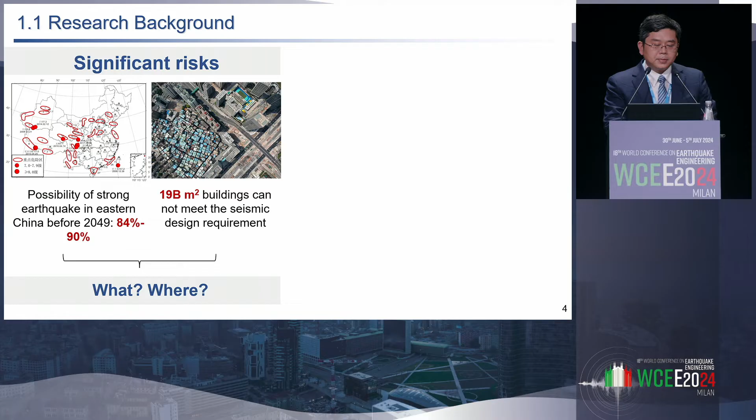So you can clearly see that my presentation contains 2 parts. Why do I bring these 2 parts here? It's because, firstly, in many countries, including China, we have significant seismic risk. So we want to know what will happen if an earthquake comes, and where the risk is. Another issue is that we are living in an aging population. We have a lack of construction laborers, so who and how can we address these significant risks?

So first, for the what and where of the significant risks, we need to do multi-hazard simulation of real-world large cities. Such simulation should be accurate, efficient, and realistic, because the managers of the city are always non-professional people. There have been some very good models for city-scale simulation, but many of these models are empirical models. So they use previous earthquakes to predict the damage of future earthquakes.

However, for example, in China, we haven't had an earthquake in the dense cities for many years, and we have a lot of new structures that never experienced any earthquake in human history. So facing this question, we said, okay, maybe we can move to the physics-based model.

So no matter what kind of city or what kind of building you are, you should follow the nonlinear structural dynamics. So we can use nonlinear time history analysis to analyze the behavior of a building or a city in an earthquake.

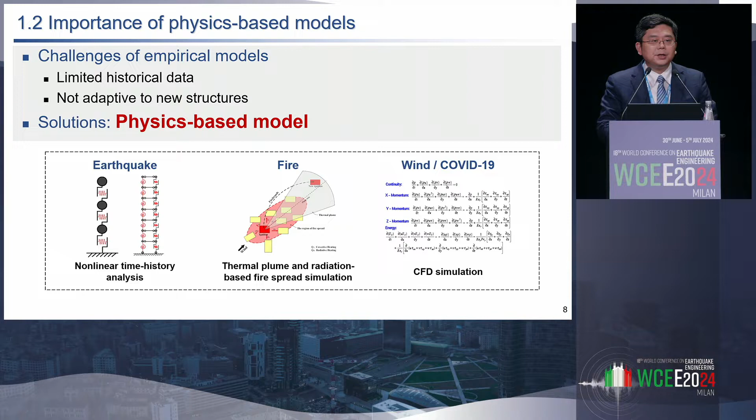And when we talk about the lack of construction labor, I'm a structural engineer, and all the design work is very labor intensive. How to improve construction efficiency is a big problem throughout the world. Particularly for the design industry, we have problems like low efficiency that cannot satisfy the demand.

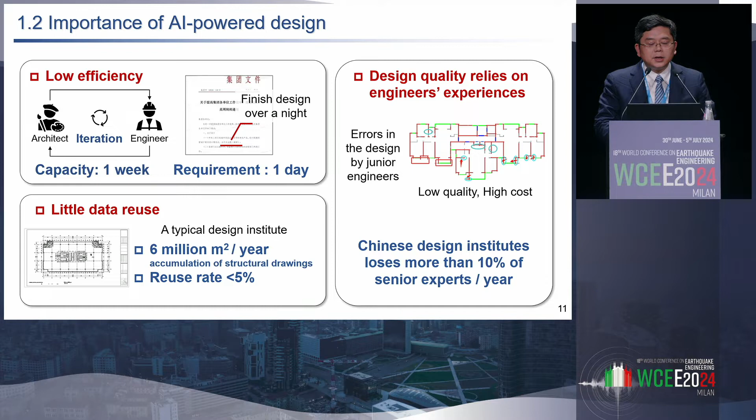We have a lot of design data, but little of it has been used. And our design quality relies highly on the engineer's experience. So if we can bring AI to help us, we can improve our design efficiency. We can change the knowledge of design from the brains of the engineers to a fixed asset of computing code of the company, and we can also improve the design quality of junior engineers.

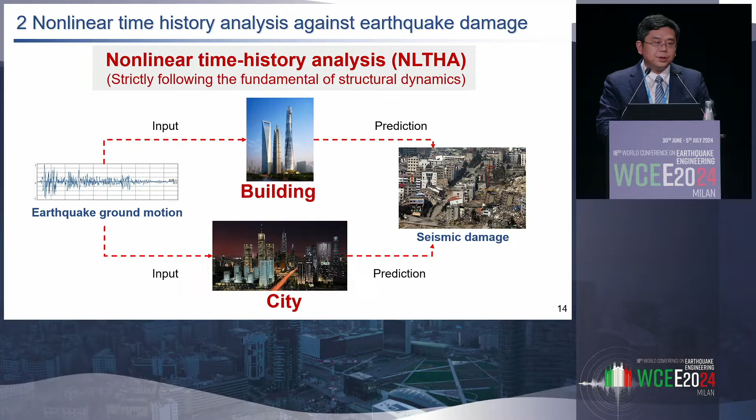Okay, so first I'm talking about nonlinear time history analysis from building to city scale. As I mentioned, if we can do nonlinear time history analysis of a building or a city, it will strictly follow fundamental structural dynamics, so we can address the problem of new cities or new buildings.

When I began my career on this topic about 20 years ago, China started building a lot of super-tall buildings. The buildings are very, very tall, their component size is huge, and we are facing very strong earthquakes. So it became a critical challenge to us.

And I'm thinking about why we do nonlinear time history analysis of the building. I think our purpose is to quantify the performance of the whole structure under strong earthquakes. That means our numerical model should analyze the complex whole structure, and we can study the collapse behavior of the structure.

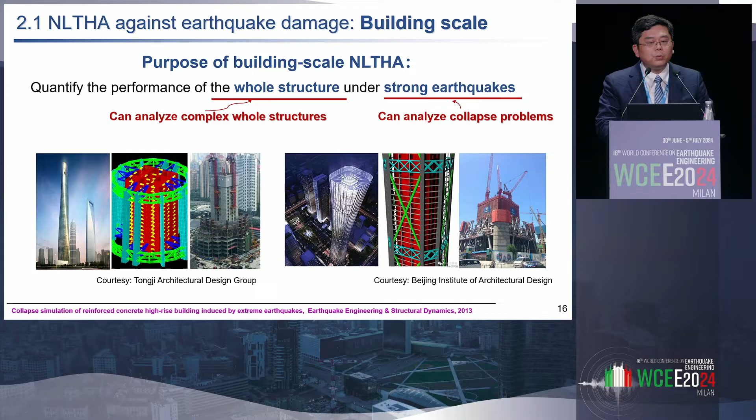If you look at the photo of this real-world structure, although we have many very good numerical models, few of these models can be used to do collapse simulation of this real-world big structure. So we propose using the fiber beam element model and the multi-layer shell element model, because both models are based on material constitutive laws. So they are very adaptive to different materials, component sizes, and loading conditions for real-world structures.

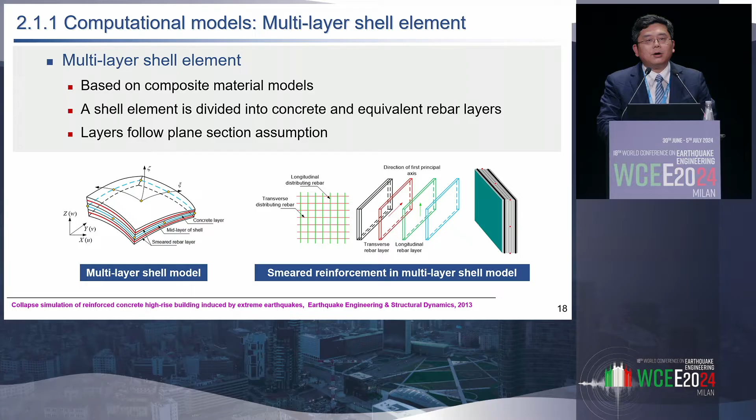Many of you are very familiar with the fiber beam element, and we did some work on the multi-layer shell element. We have a shell element and we divide it into many layers, concrete or steel, so that we connect the micro-scale material behavior with the macro-scale bending force and shear force at the component scale.

We also developed some new shell elements with better performance to simulate the behavior of shear walls. And some of these models, as Professor Deierlein said, have already been integrated in the OpenSees software. So finally, in 2010, we could use this model to do the collapse simulation of the tallest building in China. This is the Shanghai Tower, with a height of 632 meters. We use fiber beam elements and multi-layer shell elements to simulate the components of this super tall building.

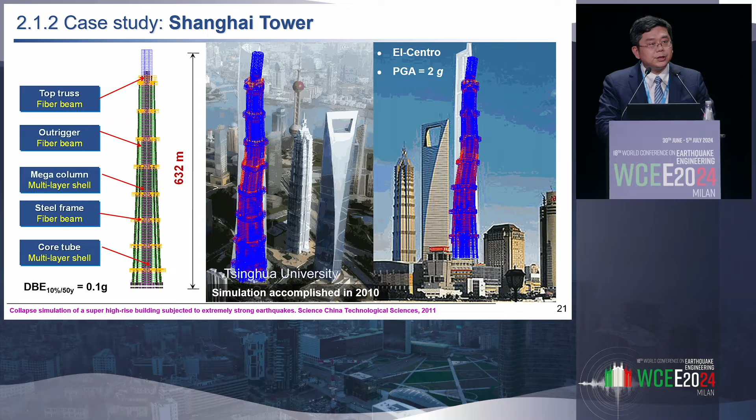So we can clearly see how the failure starts from the coupling beams, then goes to the mega columns and the shear walls, and finally to the outriggers. So it helps us understand the failure mechanism of this super tall building.

Okay, so in addition to this simulation, we can actually use this technology for design optimization of real-world structures. In 2011, Beijing planned to construct a super tall building with a height of more than 500 meters. And the design intensity of Beijing is 0.2 g, so it is a very strong earthquake load.

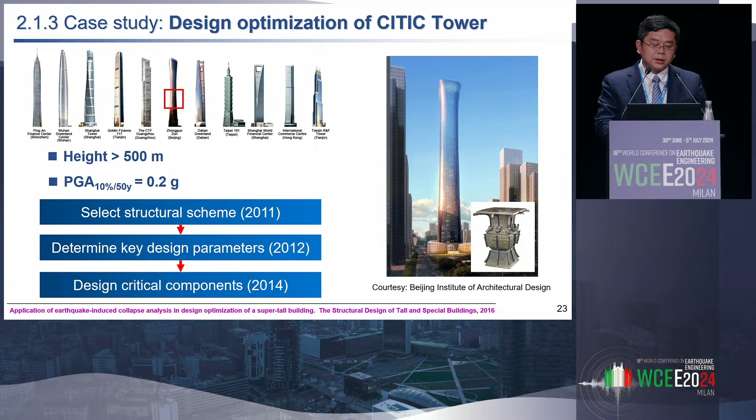We were involved in this project from 2011 to 2014, from the selection of the structural scheme to the design of critical components. At the beginning, the design agency gave this kind of design, which we called a half-braced scheme. They have the mega brace in the lower zones of the structure and remove the mega brace for the upper zones of the structure.

We found there's a lot of problem for this structural scheme. For example, in the surface between the mega brace and without mega brace, there will be a weak point and induce the collapse of the building.

So when we find the weak point of the structure, we can work together with the design agency to optimize the design. After the optimization, we get the fully-braced scheme. We can increase the collapse margin ratio by about 15%, but at the same time save material by about 11%.

So this 11% of material is 84,000 tons, which is quite a lot of money. So this optimization is quite welcomed by the design agency.

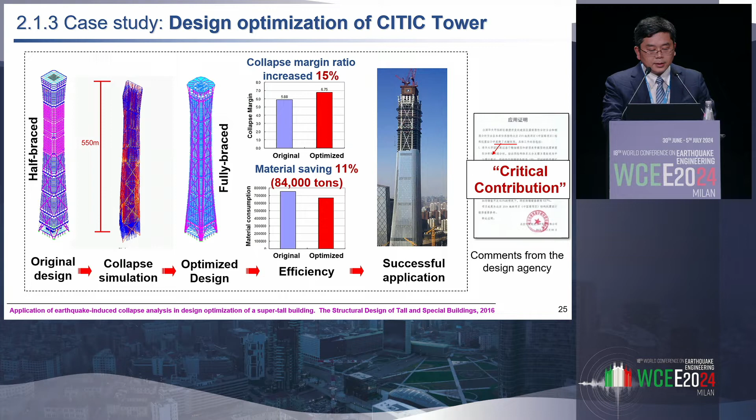Furthermore, from our simulation we can find that the failure always happens at zone 6 of the tall building, so this will be a critical part of the structure. We can increase the shear wall by embedding some steel braces to increase its strength and ductility.

We did the collapse simulation and found that such embedded braces only increase the steel consumption by about 0.1%, but can increase the collapse margin ratio by more than 12%. So it is a very efficient way to improve the collapse resistance of this tall building.

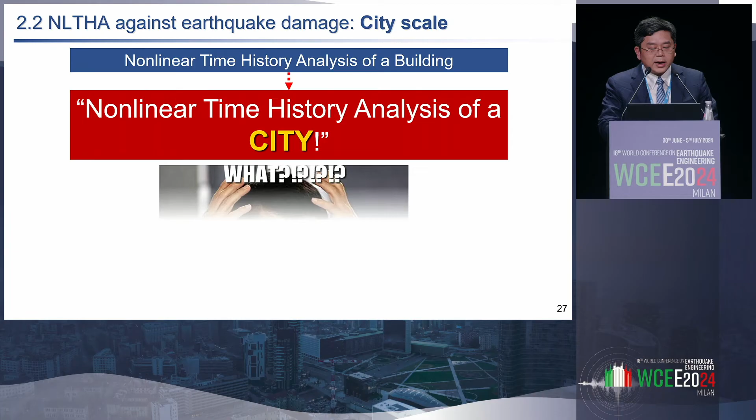So when we finished the two super tall buildings, we thought that since we can do nonlinear time history analysis, why can't we try to do a nonlinear time history analysis of a whole city? About 17 years ago, we had the beginning of this idea.

Some of us said, okay, this is a very crazy idea. Why? Because for a single building we have very detailed structural information, and no matter how complex the structure is, it's only one building.

But when we're talking about a city, we have very limited design information. We cannot get the design drawing for each building, and we have hundreds of thousands of buildings to analyze.

So we said, at that time we don't know how to model that, we don't know what kind of computer can solve this problem, we don't know how to display the result, and we even don't know who will use the result.

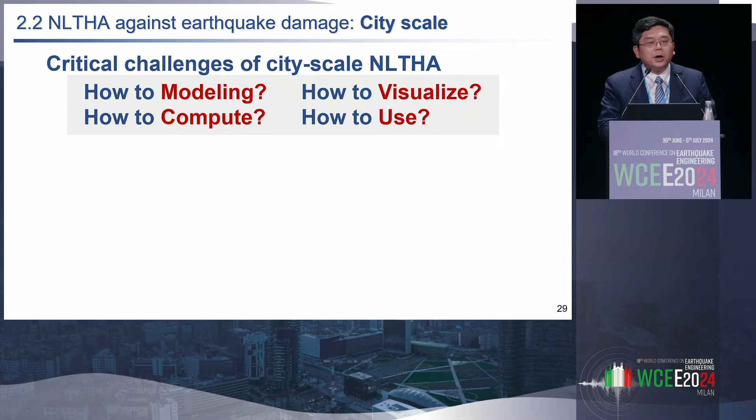But as Newton said, we should stand on the shoulders of giants. There are two giants here: one is AEBM by FEMA, and another is IES by Professor Hori. Based on these two models, we proposed the city-scale nonlinear time history analysis method.

This method has received awarded patents from China and the United States. It can strictly follow the fundamentals of structural dynamics, and it can accurately represent the characteristics of different buildings and different ground motions.

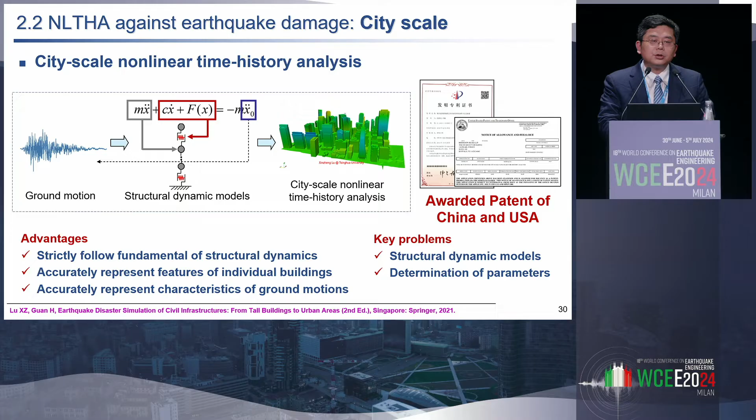So the key problem of this method is how to establish the structural dynamics model for each building and how to determine the parameters of each building. So we propose this multi-scale structural dynamics model.

For conventional buildings, we select the moderate fidelity model. We use the MDOF shear model for frame structures or masonry structures, and the MDOF flexural-shear model for tall buildings. Of course, for some special buildings we can use the high fidelity, refined model to do the simulation.

Another challenge we are facing is how to determine the parameters of the MDOF model based on the building inventory, because we don't have the design drawing of each building. So we propose a method: based on empirical formulas we can determine the story stiffness, based on the design code we can get the design strength, and based on test data we can get the actual strength and actual ductility of the building.

Because time is limited, we cannot go into too much detail. The detailed work can be found in the paper shown at the bottom of the slide.

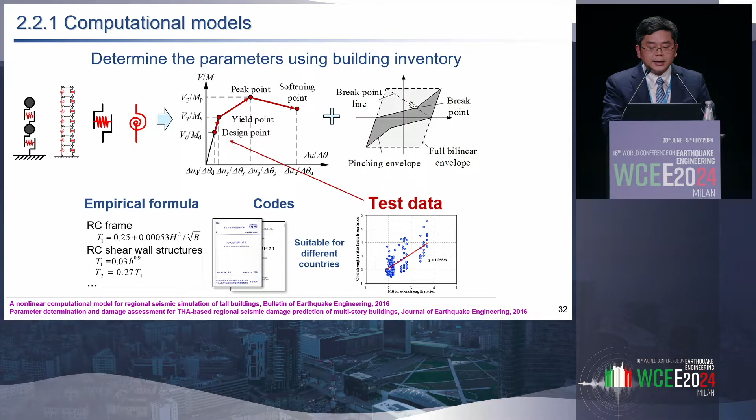For the computational challenge, although you have a city with thousands of buildings, if you buy a GPU for about $1,000, you can have hundreds of cores. If you let each core compute for each building, you can get a very high acceleration ratio, so you can use a very low-price computer to do the simulation.

This kind of city-scale time history analysis has many advantages. First, it has high accuracy. Because it's a physics-based model, you can easily do a lot of comparison: you can compare with test data about interstory behavior, compare with monitoring data to know the drift, and also compare with actual earthquakes to predict the damage.

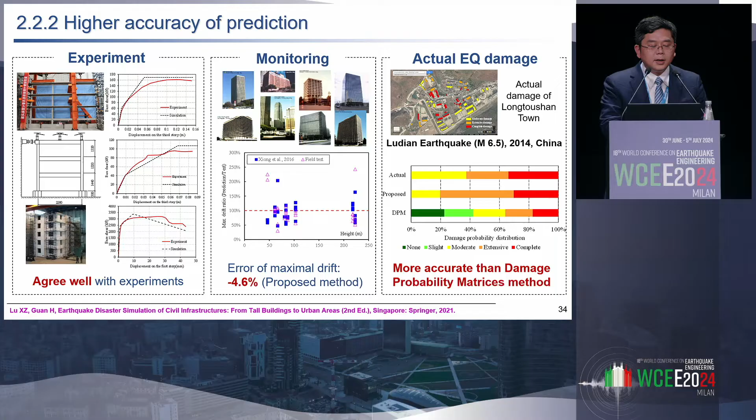The second advantage of this method is that it's very good for visualization. In old days, when we did earthquake damage prediction, we only showed tables or numbers, but this is very hard for non-professional people to understand.

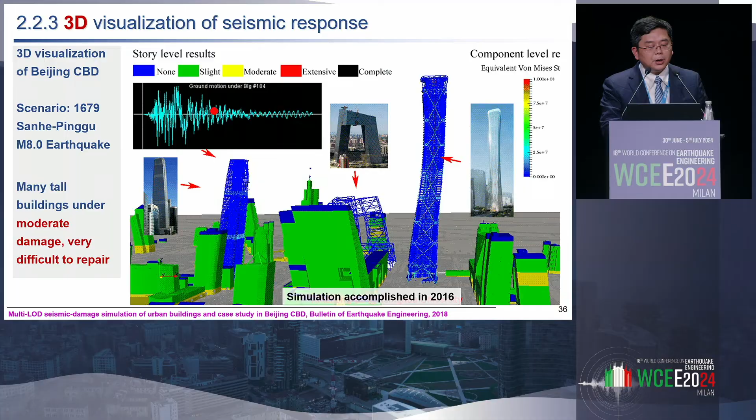We input the Sanhe-Pinggu magnitude 8 earthquake, and we can clearly show the shaking of the tall buildings. We not only know the shaking of the building, we can also know the damage of the building. Blue means no damage, green means slight damage, and yellow means moderate damage. So we can know the damage of each building on each story at each moment, and it's very easy for people to understand.

Further, if we combine this dynamic simulation result with some photorealistic three-dimensional model, we can produce something like a movie to show the shaking of this city. It's very easy for non-professional people to know what will happen to their city if an earthquake comes.

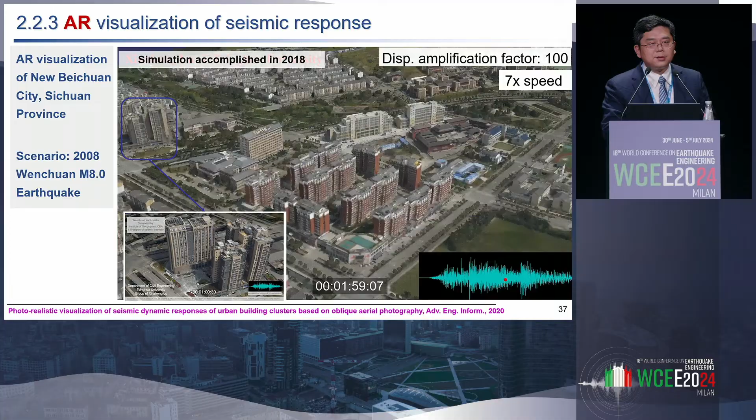This method can also be used for complex terrain. This is the new Beichuan city. We can not only shake the buildings but also shake the mountains, and we can see the deformation of the mountains. We can understand why the acceleration on top of the mountain will be stronger than at the foot of the mountain. So it can help us do a lot of study.

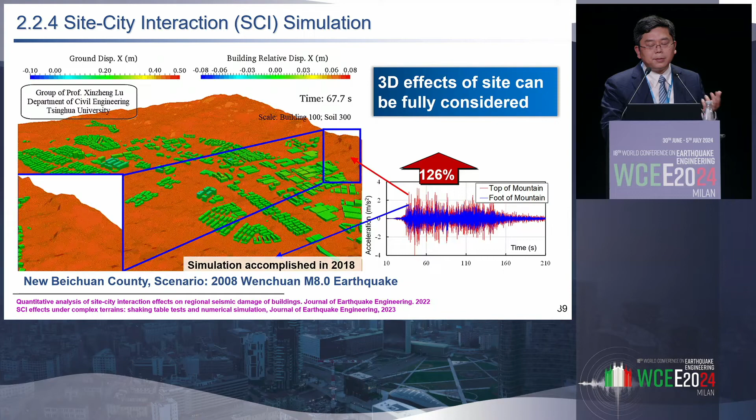The fourth advantage of this method is that it's very good for resilience assessment. Now everybody is talking about resilience, but to assess resilience we need more EDPs, engineering demand parameters. We not only need interstory drift, we also need, for example, peak floor acceleration or residual displacement of each story. With nonlinear time history analysis we can know all these EDPs for each building, and when we combine it with a good performance group and a good data model, we can get a better prediction for the resilience of the city area.

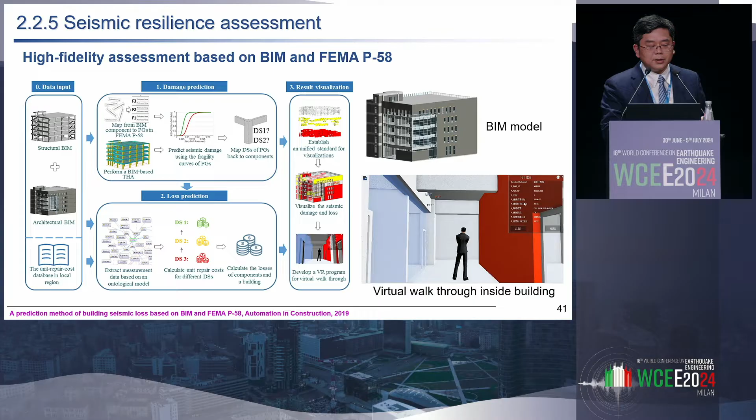For example, we can combine the building information model with FEMA P58. Then we can know the damage on each component, and we can go inside the building to see what happens to it. We can further extend this to a city scale.

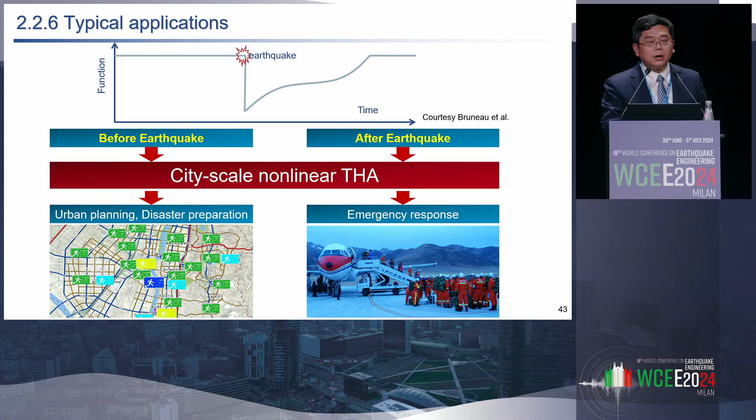This technology has many applications, not only for disaster prevention before an earthquake, but also for emergency response after one. A typical example is what we did together with the SimCenter for the San Francisco Bay Area. Professor Steve Mahin helped us collect 1.8 million buildings in the San Francisco Bay Area.

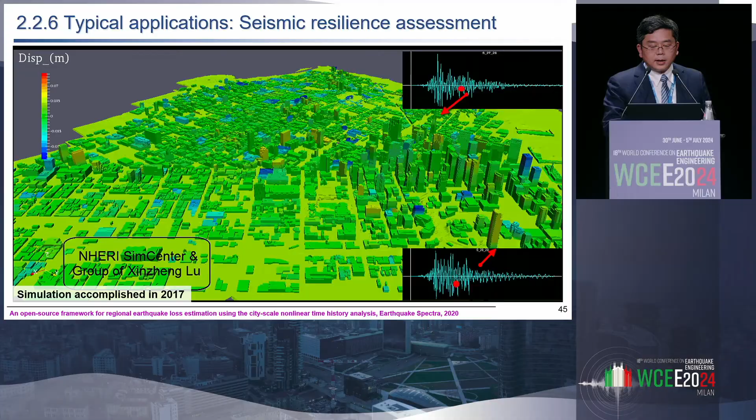This is a magnitude 7 earthquake generated for the Hayward Fault. With this scenario, each building has a different ground motion, so we can clearly see the shaking of the entire San Francisco area subject to this earthquake scenario. It clearly shows the movement and even the damage of each building in downtown San Francisco. With this simulation result, we can further study the loss ratio and the repair or rebuild time of each building, which sets up a very good foundation for our study on resilience.

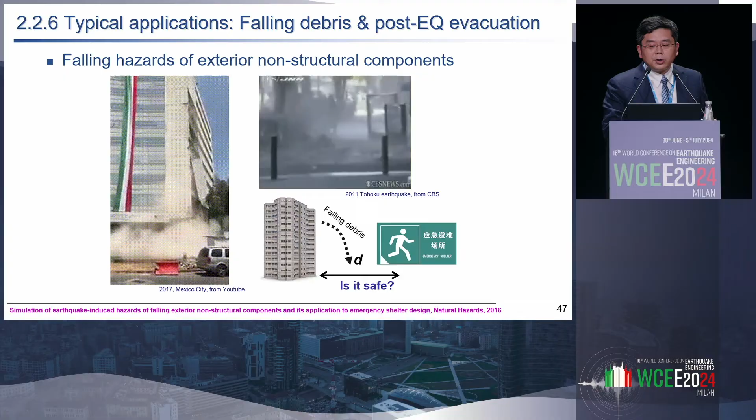Another advantage of this method is that it can be used to study secondary disasters, for example falling debris. This is some footage taken from the Mexico earthquake or Japan earthquake — the building is still standing, but debris falling down from the buildings may kill people. How to predict this falling debris is a very critical question, but with our city-scale nonlinear time history analysis, we can solve this problem.

So we first do the analysis, then we know the shaking of the building, the interstory drift of each building, and also the velocity and acceleration of different stories. With this, we do the experimental work to know the failure criteria of the falling debris, and simulate the distribution of the falling debris on the ground.

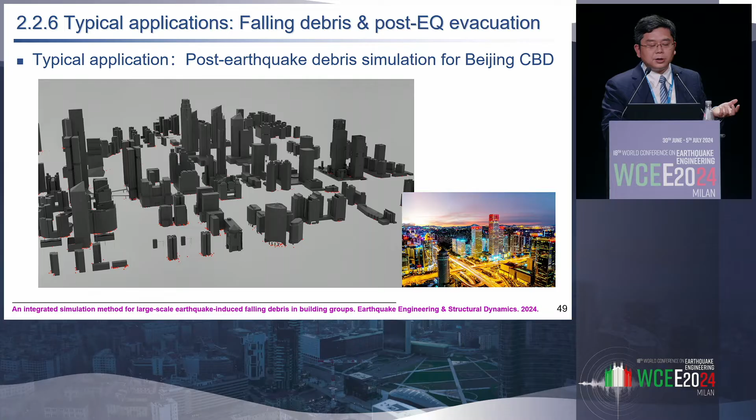With this falling debris data, we can use it, for example, to select a better emergency shelter location considering the falling debris, or we can do the evacuation simulation considering the falling debris. You can see that because of the existence of falling debris, the evacuation time changes quite a lot.

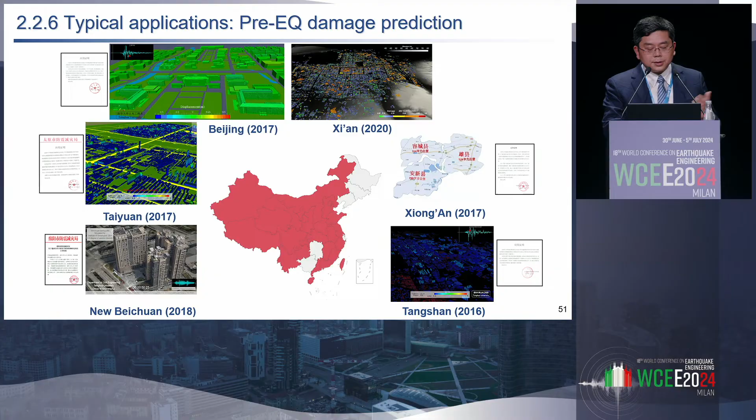This technology has been used in many Chinese cities. Here are just some examples. One of the recent, very interesting applications is in the 2022 Beijing Winter Olympic Games, where we used this technology to assess the seismic risk of the Olympic regions and got very good comments from the Olympic Organization Committee.

This technology can not only be used before an earthquake, but also for post-earthquake assessment. In traditional ways, when an earthquake happens, we use a lot of empirical models to predict the seismic intensity and building damage, and they have a lot of uncertainty.

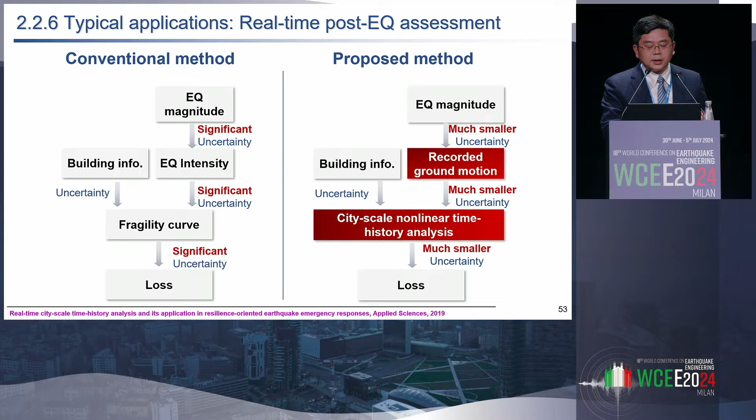Now we can directly use the recorded ground motion and do city-scale time history analysis to significantly reduce the uncertainty. So we developed this platform, called real-time earthquake damage assessment using city-scale time history analysis. We call it REDACT. We use the very large strong motion network in China.

This is one of the typical applications of this technology. In 2017, China had a magnitude 7 Jiuzhaigou earthquake.

After the earthquake, some agencies used the conventional way to predict that this earthquake would result in tens of thousands of building collapses. We used our model to predict very small possibility of building collapse. When we reported this result, they were quite surprised because it was a magnitude 7 earthquake. How is it possible? But after one month, the site investigation showed that the collapse ratio was only about 0.1%, which agreed very well with our prediction.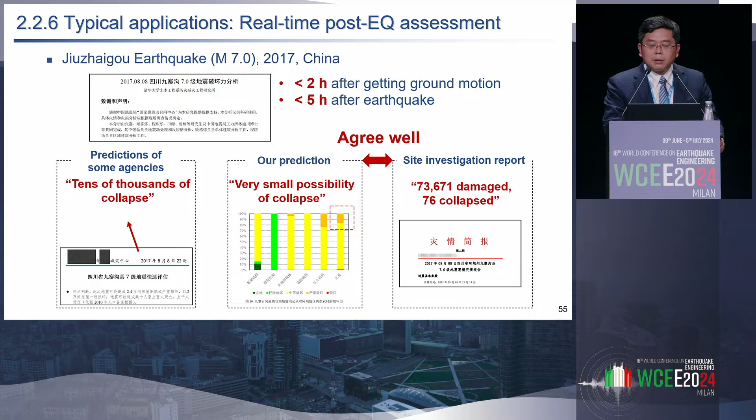So then we want to extend it not only for earthquake but also considering different hazards. When working on a city, we always face the problem of how many systems we want to build up - a system for earthquake, another for wind, another for fire. So we want a platform for all these multiple hazards. Also, the city not only worries about the regional scale, but also about some important buildings, so there are multi-scale problems.

So we thought, why not call it a city information model? We combine the GIS model and the building information model together. With this city information model as the database, we do physics-based hazard simulation, and this result can serve many different purposes.

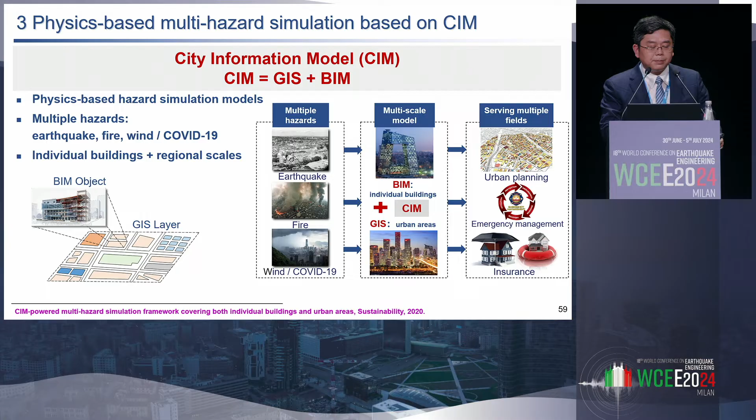This is a typical example where we set up the city information model of the entire Tsinghua University campus. We have the entire campus model and also detailed models of important buildings, so we can do regional scale simulation for earthquake, fire, wind, even COVID, and also building-scale simulation for different hazards.

Here is one example of how we do physics-based fire simulation at building scale with this city information model. We start from the building information model, then extend it to FDS fire simulation. We can get a fire scenario, and we can also do evacuation simulation in such cases.

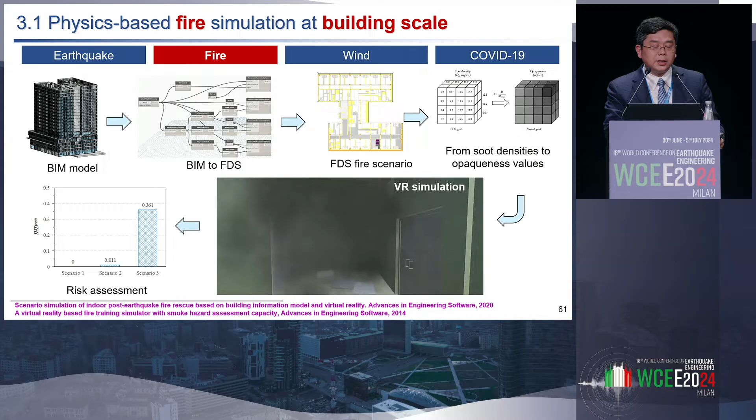And we can also do the physics-based fire simulation at the regional scale. The older empirical fire spread models have many problems, so we propose using a physics-based fire simulation. We consider the thermal effect, the radiation effect of fire, and the 3D evaluation of the buildings.

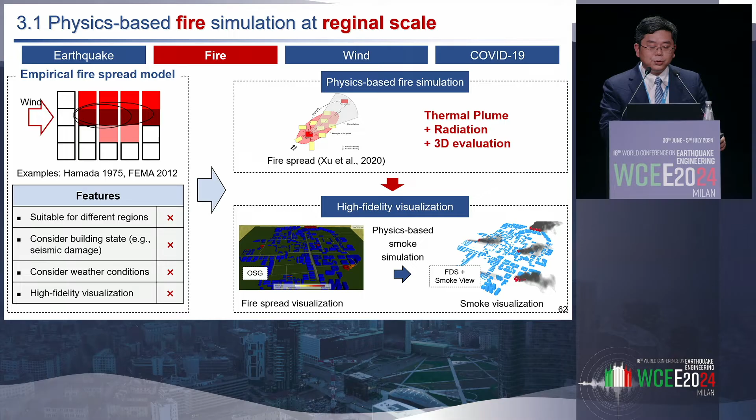So here is a typical example where these two towns had fires in China, and our simulation result agrees quite well with the actual disaster. And the advantage of this physics-based model is that we can very easily combine one disaster with another. For example, we have a physics-based fire model and a physics-based earthquake model. We can connect them together, then we can do the physics-based simulation of fire following earthquake. And they have many advantages over existing models.

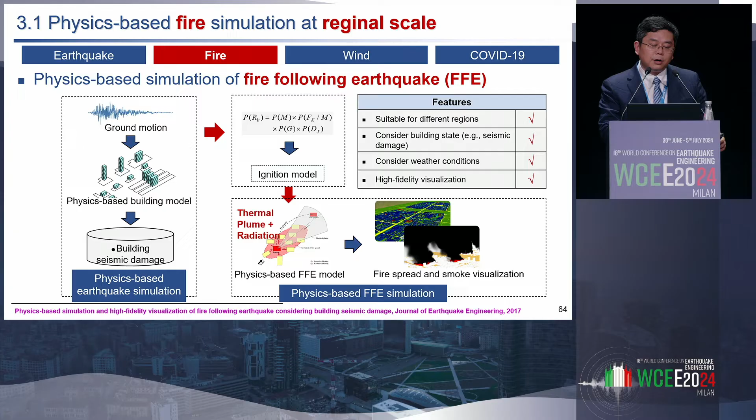So this is what we did for Taiyuan City, fire following earthquake. You can see that the simulation result is quite similar to the real-world fire following earthquake.

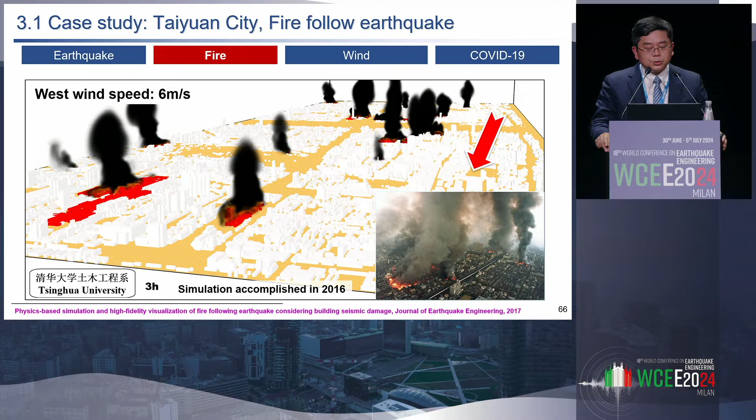And we can also do it for wind. The conventional empirical model for wind has many problems. So we can combine the city-scale time history analysis, dynamic analysis of buildings, with the city-scale large eddy simulation. So we can input the dynamic wind load to the building to get the dynamic response of these buildings.

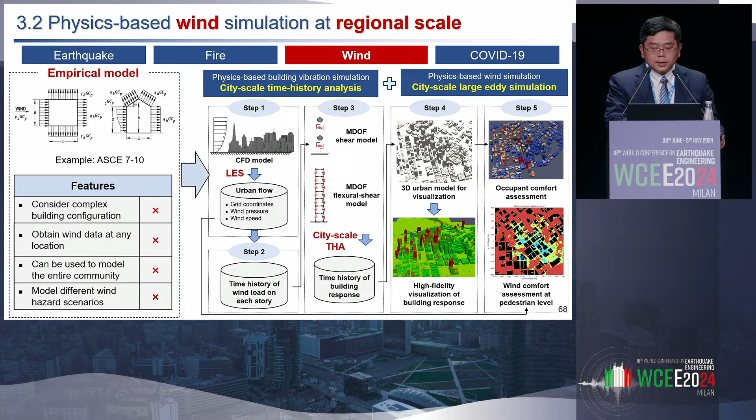It is very interesting to find that because of the overlap of different buildings, the wind load on the building is quite different from the design load. And also we find that the dynamic response of this building is quite different from what the design code specifies in our design specifications. And we can even do it for COVID-19.

On Monday, we had a very beautiful song in the opening ceremony about everybody fighting against time. And in January 2020, at the outbreak of COVID, we had the real-world challenge to fight against time. We were ordered to construct a hospital in only 10 days, from nothing to in service. This is a very challenging question, and one of the problems is how to reduce the infection risk caused by the harmful air. Because the time is very limited, we should be very efficient and very accurate.

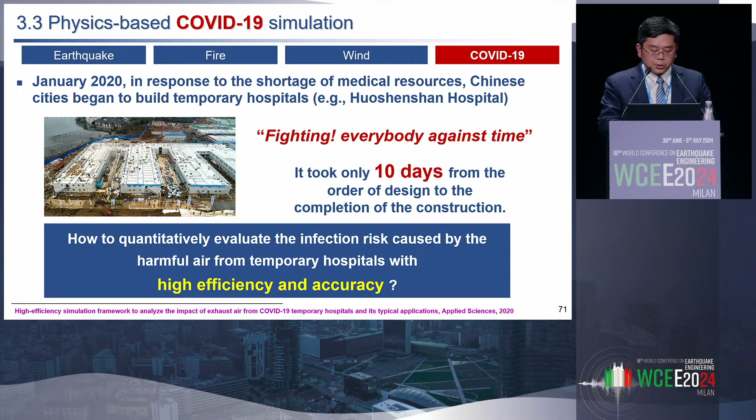So we used our proposed method so we could finish the design optimization in hours. On January 28, we finished the design optimization of a hospital in Wuhan. The next day, we finished the design of Ditan Hospital in Beijing. And then the next day, we finished another hospital in Wuhan. So we can finish the design of each hospital in one day, and the total sick beds we served are more than 10,000. So I got a very special award from the Ministry of China. I think this is a very important award to me because we really saved lives.

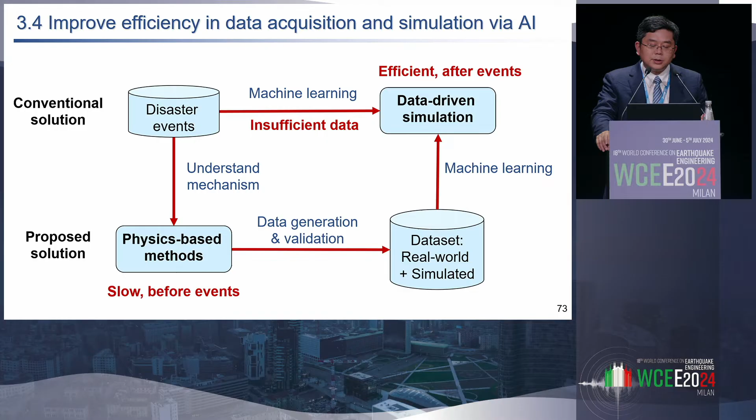And today, a lot of people are talking about using AI to further improve our disaster simulation. And we always suffer the problem that we don't have sufficient data to train our AI. So we propose that we can use our physics-based model to generate a lot of simulation data, and combine the real-world disaster data with simulated data to do the machine learning, so we can get a better data-driven simulation for the city.

It means after AI learns so much data, it can generate a new thing, a new face. And the new face is so realistic, you cannot distinguish the real-world people from the AI-generated people. So when I saw this animation 7 years ago, I recognized that, okay, there will be a revolution in our industry. Why? Because we are structural engineers. The most important outcome of our work is the design drawing.

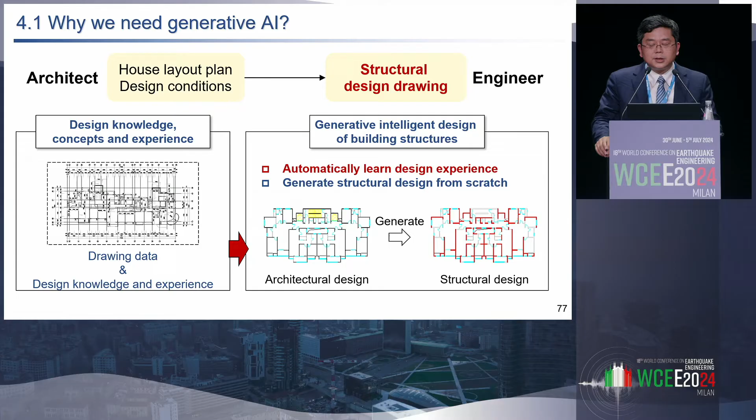No matter if it's a face of people or a design drawing, it's only a picture to a computer. So if AI can generate a human face looking like a real-world human, why can't AI generate a design drawing looking like a real-world human design? So that is the fundamental idea of why we can use generative AI to help us do structural design and improve design efficiency quite a lot.

And there are 3 key algorithms to help us generate this AI-based design drawing. Engine 1 is the generative adversarial network, GAN. Engine 2 is the graph neural network, GNN, and engine 3, we call it the diffusion model. The equations of these algorithms are not shown on the slide, because I think after 2 days of very productive conference, everyone is quite tired. So I don't want to talk about too much physics and mathematics here. I just want to show the fundamentals of these algorithms.

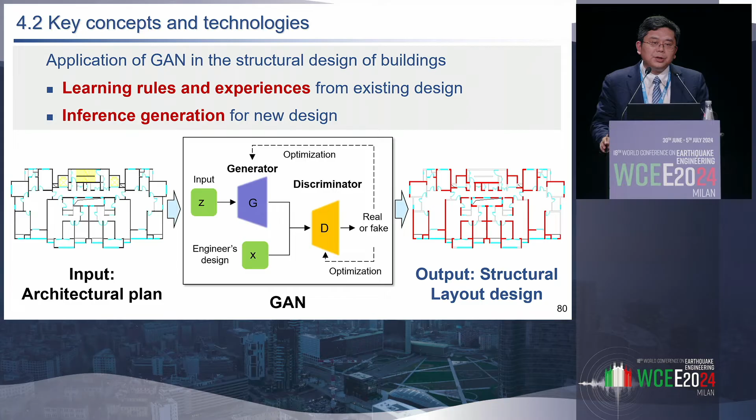So we can do it for AI-powered design: we keep inputting design drawings to the GAN for the AI to learn how to generate a new design. And after optimizing against each other, they can generate a new design that looks like a real-world human design. The second algorithm is GNN.

What is a GNN? The data should start from a graph. A graph is a topological structure made with nodes and edges. The GNN is a neural network working with a graph. And there are several algorithms that can be used for structural design. The first one we call the edge classification problem. What does it mean? It means that we have two objects. We want to know the relation of these two objects.

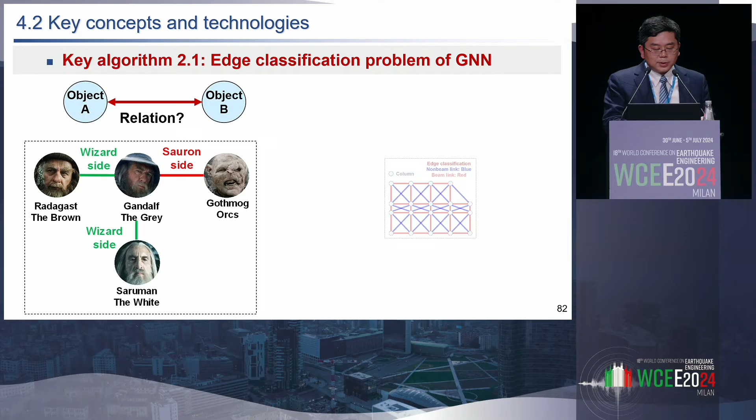So we can use The Lord of the Rings. We have all seen the movie The Lord of the Rings. We can use it as an example. So we can see that we can separate these people to the wizard side or Sauron's side. So this algorithm can help us with structural design, for example, the layout of the beams.

So we can make the link between every two columns in a structure. And we let the AI learn the existing frame designs. Then the AI identifies, OK, this link is a real-world beam we need, and this link doesn't need to be a beam. So with this algorithm, we can finish the layout of the beams of frames with AI-powered design.

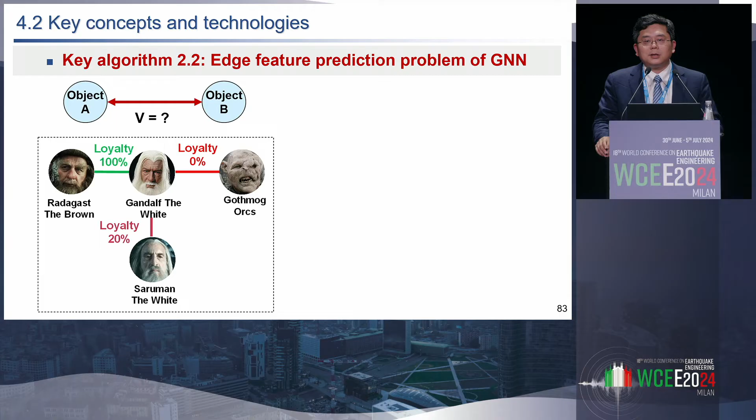Another algorithm is the edge feature prediction of GNN. It means that we have two objects, and we need to predict the value between the two objects. We still use Lord of the Rings as an example. We can say, OK, even if these characters belong to different sides, they have loyalty between these different characters. And this algorithm we can also use, for example, for the layout of the shear wall. So between any two nodes, we want to lay out the shear wall.

There are several possibilities. If it is a continuous shear wall, the feature will be 50%, 50%. If on the left side is a shear wall and the right side nothing, then it will be 50% and 0. If both sides have shear wall but with a door in the middle, the edge feature will be 30% and 30%. So after learning, AI predicts the feature between the two nodes, and then AI knows how to lay out the shear wall.

And also the diffusion model, where we can remove the noise from the drawing, and finally the remaining components, the remaining pixels, will be our final design result.

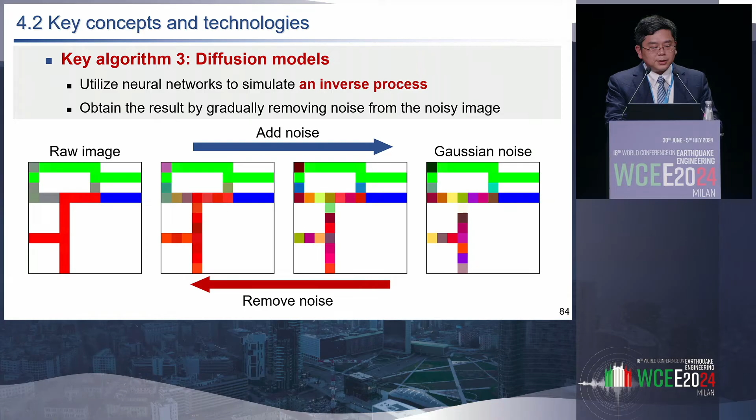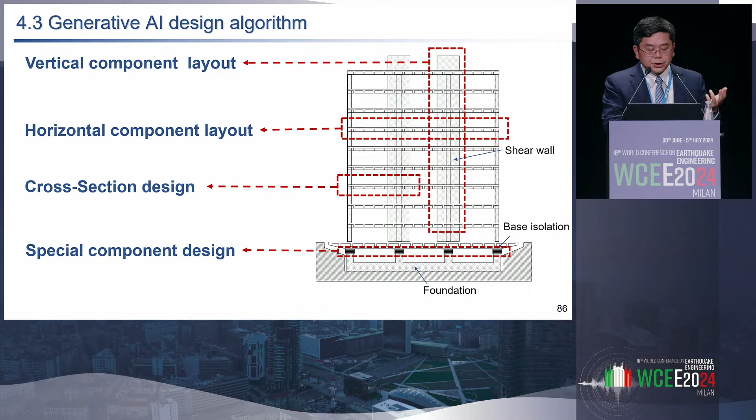OK, so after this algorithm, the next step is to establish a data set for AI to learn. So we established maybe the world's largest structural design data set for AI training. So currently, AI can do this work: vertical component layout, horizontal component layout, cross-sectional design, and even some special components like base isolation design. Because today we are talking about earthquakes, I will first emphasize the layout design of shear walls.

So how do humans design shear walls in the real world? This is what engineers do. Firstly, the architect has the architectural planning and the design conditions of the building. For the first step, we lay out the shear wall at the locations given by the architecture. Then we consider the design condition. For example, we have the design intensity, and we change the total area of the shear wall. Then we do the structural calculation to predict the structural behavior to satisfy the design code. And finally, we use some empirical rules to further improve the details of the shear wall design.

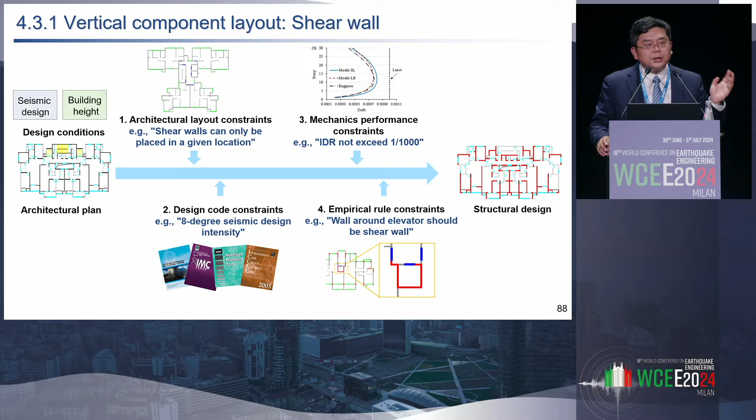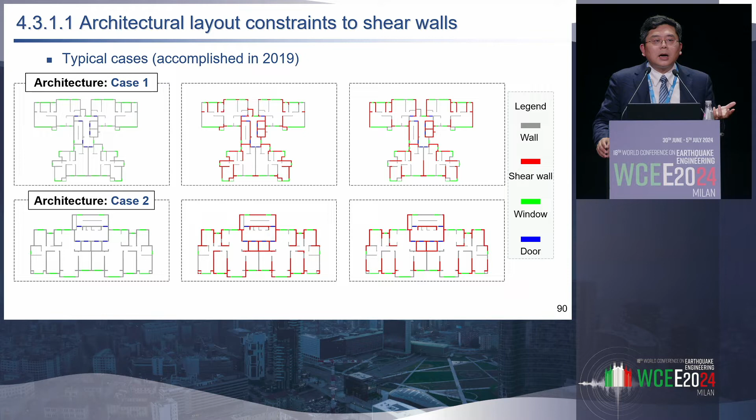So we simulate the human design procedure and propose algorithms to solve this problem. First is how to lay out the shear wall according to the architectural layout. We propose an integrated design method for shear wall layout based on different algorithms. The details can be found in these papers. And this is what we get. On the left are two buildings' architectural layouts. The green means windows, the blue means doors, and the gray lines mean walls. On the right is the layout of the shear walls. Some were done by humans, and some by AI. Can you identify which one is done by human and which one by AI?

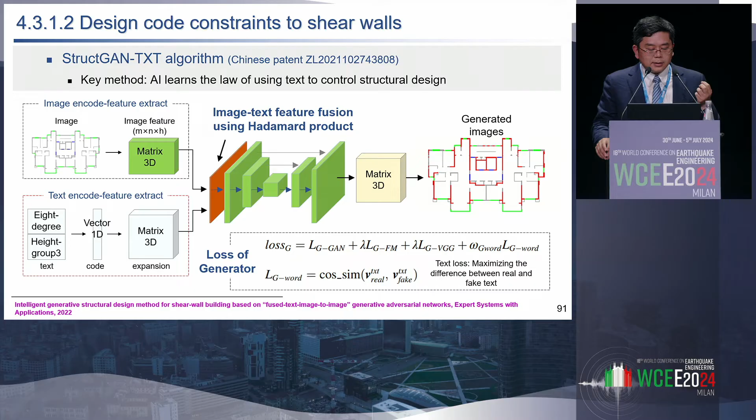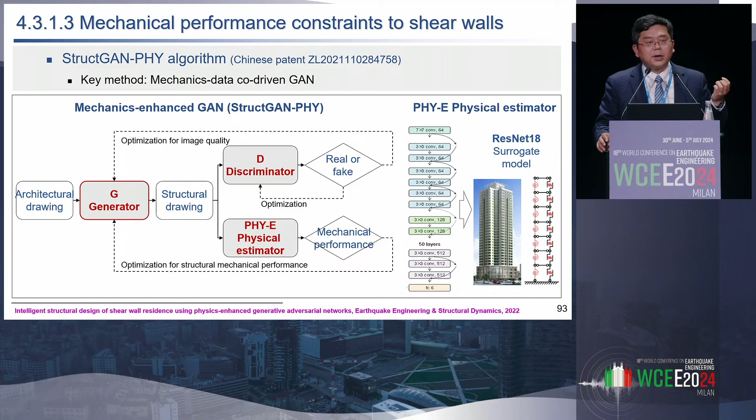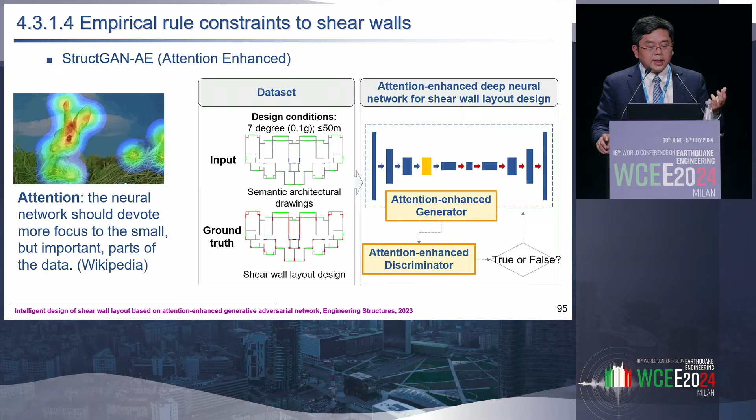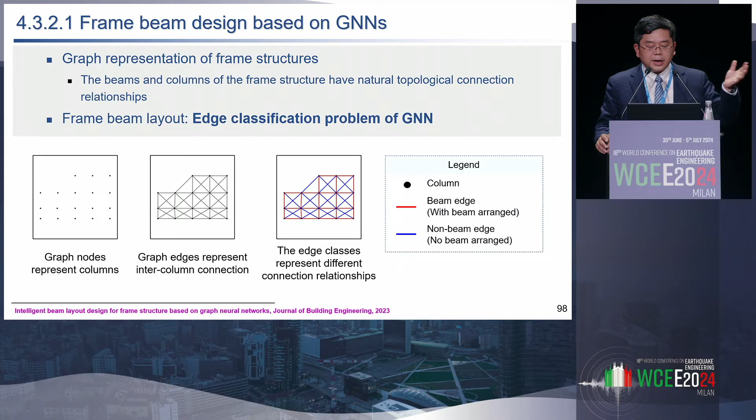On the left are two real-world frame structures, the arrangement of the columns. On the right are the layouts of the beams. Can you identify which one is done by AI and which one is done by an engineer? And here is the result.

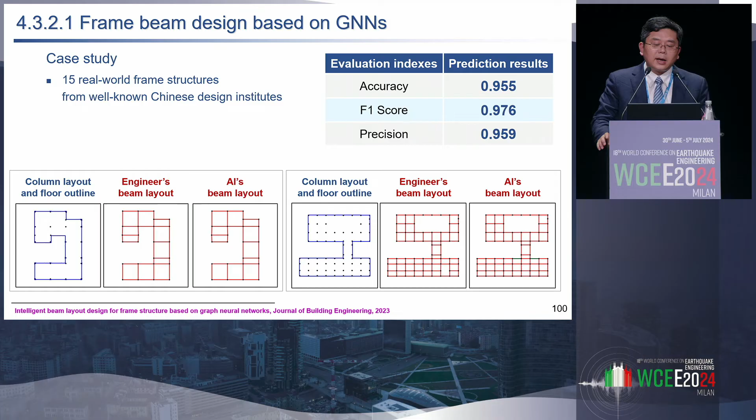The AI design is almost about 95% accurate compared to human design. And now we can further extend the beam layout to shear wall structures, but the problem will be more complicated. Because if you have two columns, there's only one beam. But if you have two shear walls, there are infinite possibilities for arranging beams.

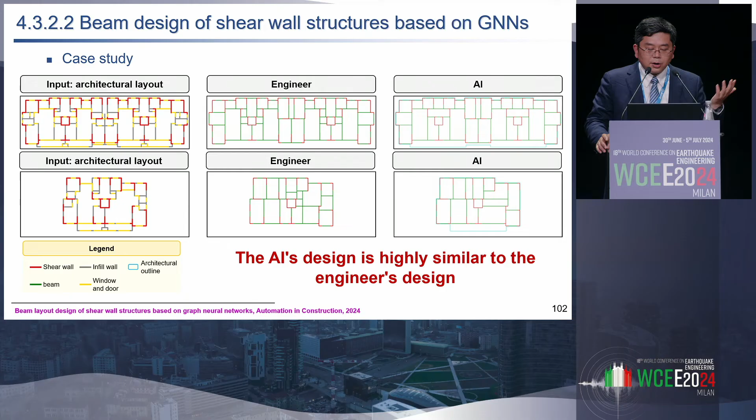And after the layout design, we can do the cross-sectional design. We propose what we call the rule-embedded generative adversarial network. We can consider the design conditions, the design drawings, and also the domain knowledge to generate the cross-sectional size of the components. Here are two examples.

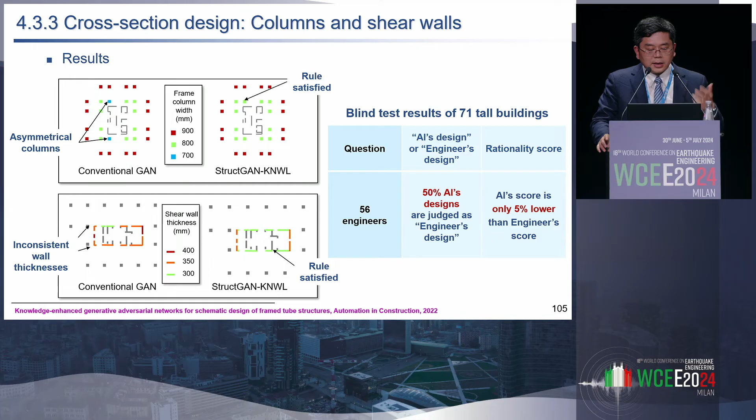For example, on the top, AI can generate the section of the columns, and with the knowledge embedded, the columns will be symmetric. And on the bottom, the AI can generate the thickness of the shear walls, and with knowledge embedded, the shear walls satisfy the consistent thickness. And we selected 71 tall buildings and did a blind test with 56 engineers, and about half of the AI designs were successfully judged as engineer designs.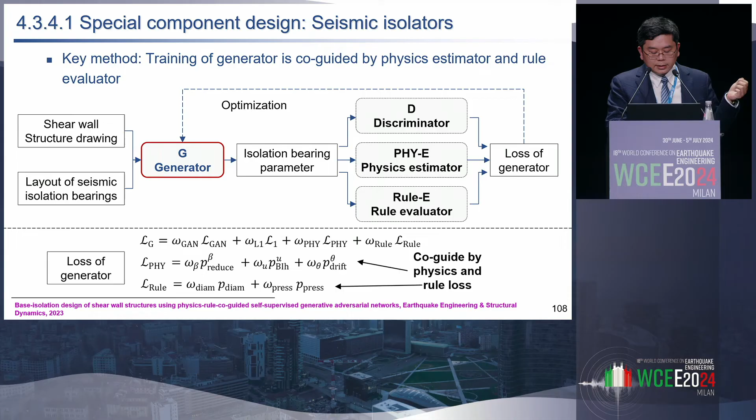And also, we can do it for some special component design. For example, for base isolation design, we can combine the discriminator, physics estimator, and rule evaluator together to generate the base isolators. So this is an example. We determine the base isolators. All the isolation bearings have suitable diameters, and the building satisfies the design code, but is not too conservative. The design efficiency is improved about 60 times. You can finish the work in just 30 seconds.

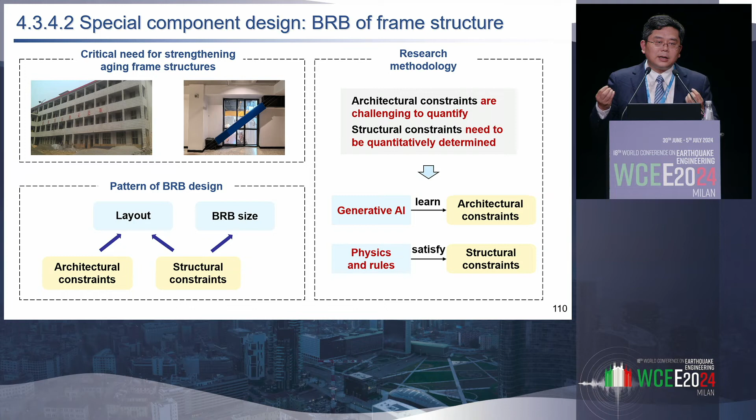And also we can do it, for example, for BRB braces for the strengthening of structures. But the layout of the BRB braces needs to consider the requirements of architecture, and the architectural requirements are quite difficult to model. So we use AI to learn the existing drawing data and then predict the feasible positions according to architectural requirements.

So here we have a two-stage design procedure. First, we use generative AI to get the feasible layout of the braces, and then we do structural optimization to get the final location and the final section of the BRBs. So here is the example. After the two stages, the brace design can be finished in 15 minutes, totally automatically.

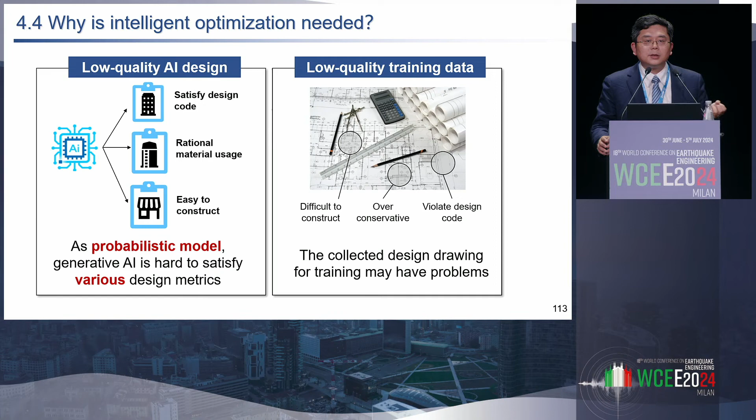And also we can use AI for optimization, because sometimes AI just doesn't give a very good result, or doesn't have very good training data. So we can do what we call intelligent optimization, meaning we use big data and learning to do the optimization. For example, when we do the dynamic assessment or the material usage evaluation, we can use the AI as a surrogate model to accelerate the procedure.

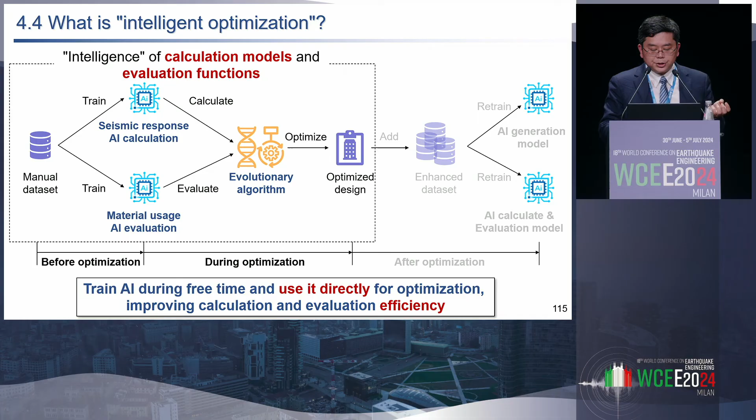And even after the optimization, we can feed the optimized data back as training data to make the AI more powerful. The key technology here is graph representation and the GNN algorithm for the entire structure at micro, medium, and macro scale. We have a building with three scales of information. First is the micro scale, for example, the sectional height and thickness. The second is the medium scale, the topological arrangement of structural components, and the macro scale, for example, the design conditions, the seismic design code.

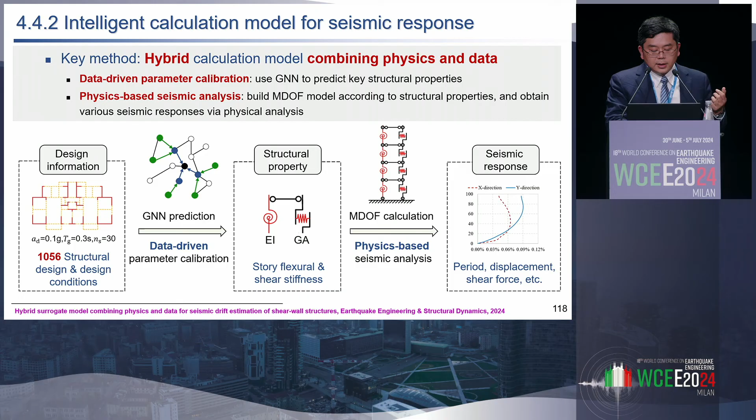So with this algorithm, we can use AI to generate more than 1,000 buildings, use them to train the GNN, and then use it to predict the structural response. And here is the result. The prediction is better than existing models, and the structural response can be predicted in less than 1 second. We can also use this method to predict material usage. So with sufficient training data, the AI can work like an engineer with 30 years of experience, knowing the material usage within a second. So this is how we do the work.

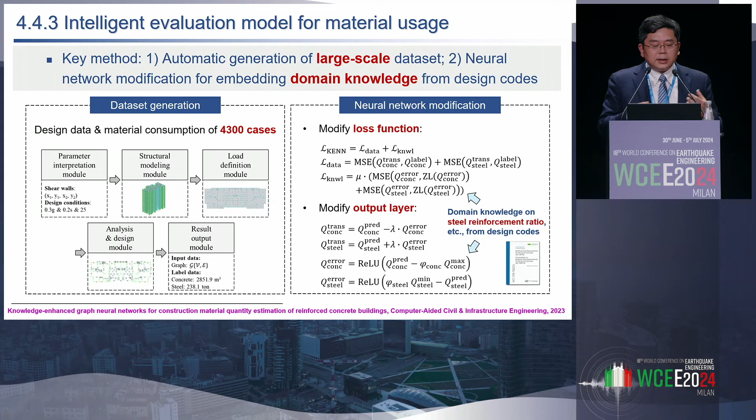First, we have AI, so we can design as many buildings as we need. So we designed 4,300 buildings, and also embedded domain knowledge into the neural network. And now we can predict the material usage, and the time is just 0.36 seconds to predict material usage.

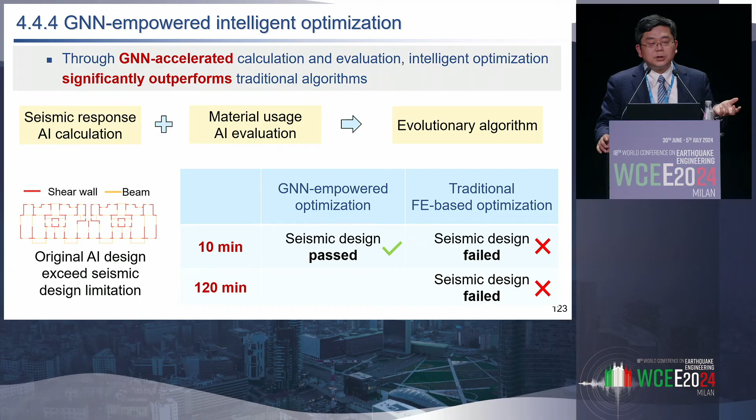So we combine the AI calculation of seismic response and evaluation of material usage, and we can do the structural optimization. For example, for this case, in 10 minutes, AI can generate a result that passes the seismic design. If you use traditional finite element, even after 2 hours, they still can't get a good result.

And we can also use the optimization algorithm to further improve the data set quality. Why? Because if you have low-quality design data to train the AI, then you get a bad AI, and bad AI gets bad design. But after your optimization, you get a very high-quality data set. And using this high-quality data set to train AI, you get a good AI, and good AI generates good design outcomes.

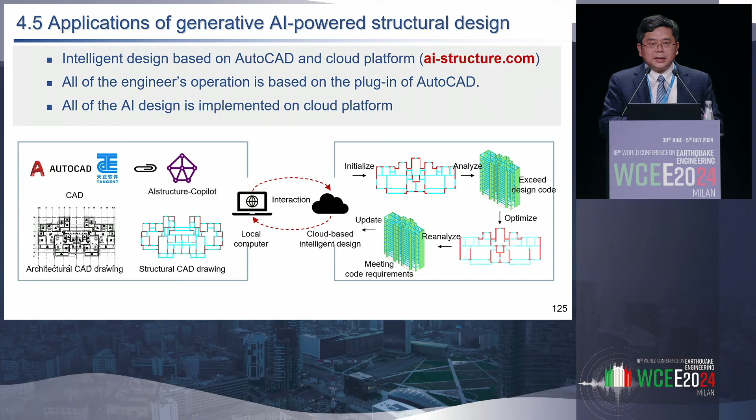So the engineers just use AutoCAD to prepare all the information they need. And then they upload the design demand to the cloud computer. And the cloud computer finishes the design and sends back the design result. So this work can be very fluently embedded in the daily workflow of the engineers.

So with this system, when the engineer has an architecture drawing, in 1 minute, AI will generate 3 or 4 different design results with different algorithms, including the shear wall design, the beam design, the sectional design, and the material prediction. Here shows the result.

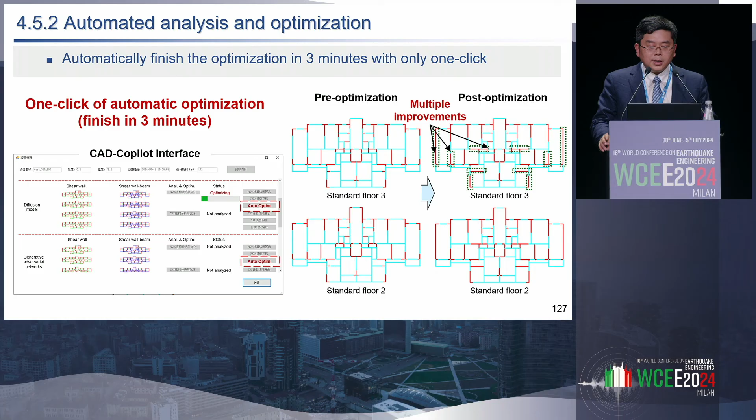And if you are not happy with the AI design result, you do a click, and in 3 minutes, you will get an optimized result. And here shows an example that with this one-click operation, you can get a much better optimization.

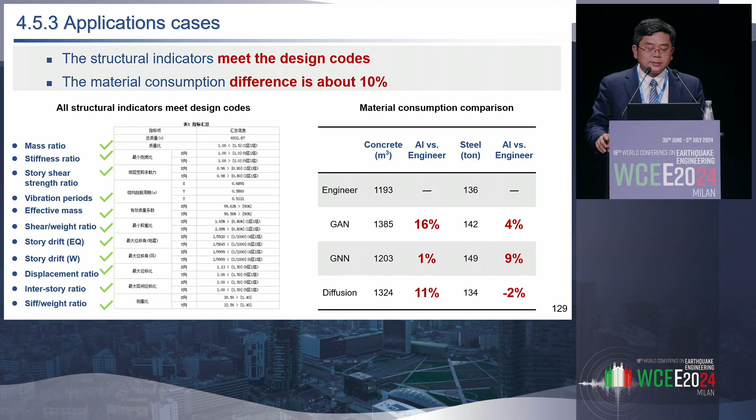And you can check the AI design outcome and find all the AI designs can meet the design code. It is not only the inter-story drift ratio or vibration period. We can check all these factors, and all these can satisfy the design code. And the AI design has similar material consumption as the engineer design. You can see that generally within 10%.

So the system has been online for about 1 year. We have 100 design institutes using the system. And this system has finished more than 1,500 design cases. If you look at AI as a real-world engineer, maybe this engineer will be the most experienced engineer in the world.

So when I prepared the slides, I just took a look at the background management system, and this is a typical case. So the top ID is the number of the building the system designed. Here is the date. The user used it on Monday, and the bottom is the design result. So they have 2 pictures, meaning they have 2 standard stories.

And finally, on the right, the color is red, meaning that the user finally accepts the design result of the diffusion model, and they download the model for further usage. So you can clearly see that the AI can really do this work and is really used by engineers.

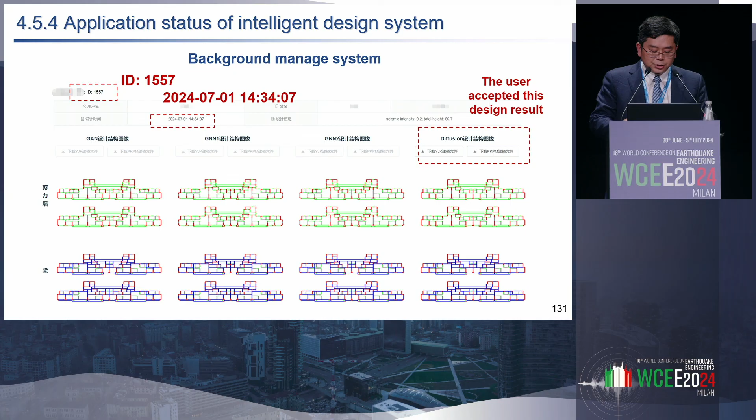Okay, so finally we come to the conclusion part. I have mentioned that we have significant risk, so we want to know what and where the risk is, and we have a lack of construction labor, so we want to know who and how to solve the problem. So maybe in the future, we can use digital twin cities to identify the problem to get intelligent disaster prevention. And we can also use generative AI to solve the problems and to get intelligent design.

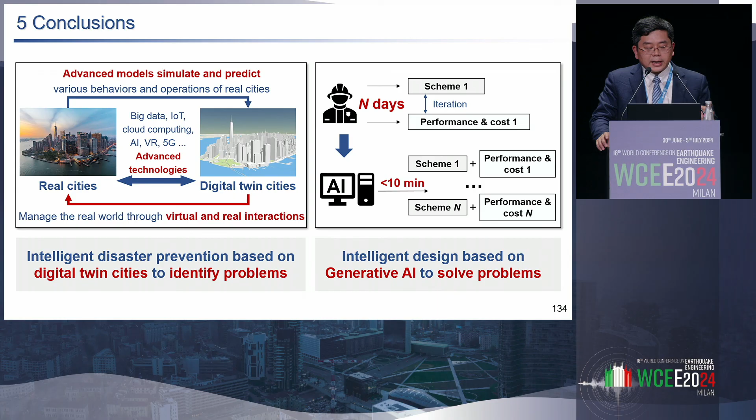Okay, so that's all for my presentation today. Then finally, I need to acknowledge all the support from the mentors, friends, and funding agencies, and many mentors have passed away, leaving us forever. I need to thank all these co-authors who wrote the papers together with me, and particularly all the students, since most of the work was actually done by them.